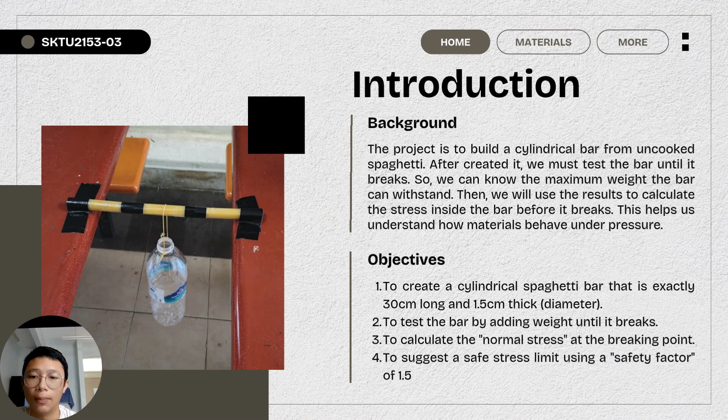Hi everyone, today I will present the model fabrication method part. There are three highlighted points that we want to show here. The first one is the material selection. We use spaghetti of any brand, a clear tape and a duct tape. Then for the geometry constraints, the spaghetti must be shaped into a circular bar with a diameter no more than 1.5 centimeters. The length of the bar must reach 30 centimeters, with 1 centimeter on each end acting as the holding point.

Next, we go to the connection and adhesive. The existing spaghetti in the market did not reach the 30 centimeters minimum length. So, the bar was separated into three sections of 10 centimeters each. The spaghetti in each section was taped using clear tape to hold the circular shape together. All three sections were then taped together using duct tape to form a 30 centimeter bar.

Next, we go to the testing part of the group assignment. There are three highlighted points here: the support, loading mechanism, and measurement tools. For the support, each end holds the bar with 1 centimeter length. For the loading mechanism, a single string was used to hang the water bottle attached in the middle of the bar. And for the measurement tools, the water volume was increased by 100 milliliters at a time using a measuring cup.

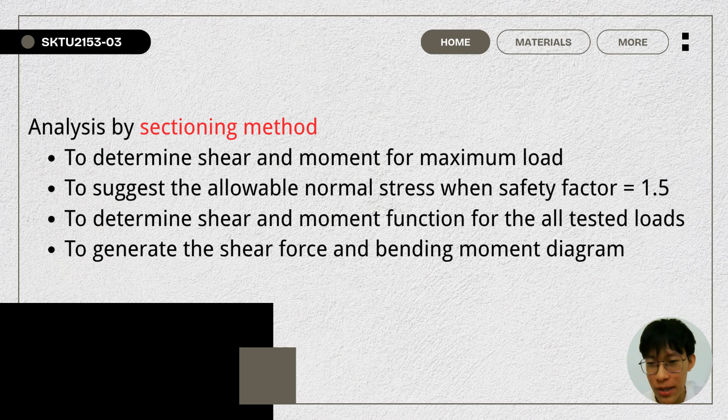Second is to suggest the allowable normal stress when the safety factor is equal to 1.5. Third is to determine the shear and moment functions for all tested load calculations. And finally, we can generate the shear force and bending moment diagram. We need to draw the free body diagram for calculation, and the assumption we make is 1 liter of water is equal to 1 kilogram. The maximum load we got in testing is 3.1 kilograms of water, and the force applied in the middle section of the spaghetti is equal to 3.1 kilograms times gravity, and finally we get

30.4 newtons. Then we need to find the reaction forces at point A and point D. For the first equation, we use the sum of moments at point A equal to 0, and we get Fd equal to 15.2 newtons. Second, the sum of forces in the y-axis is equal to 0, and we get the force at point A equal to 15.2.

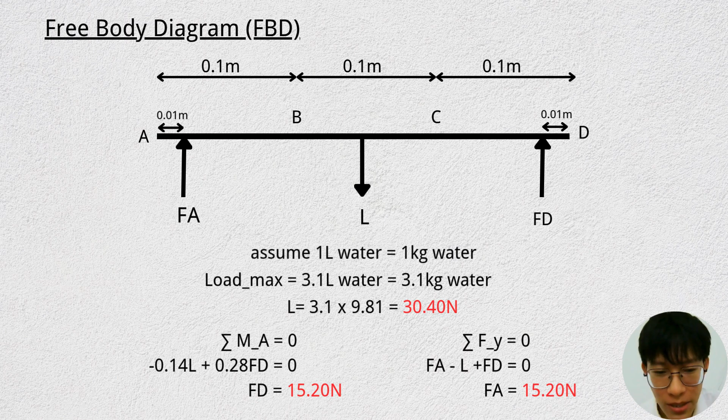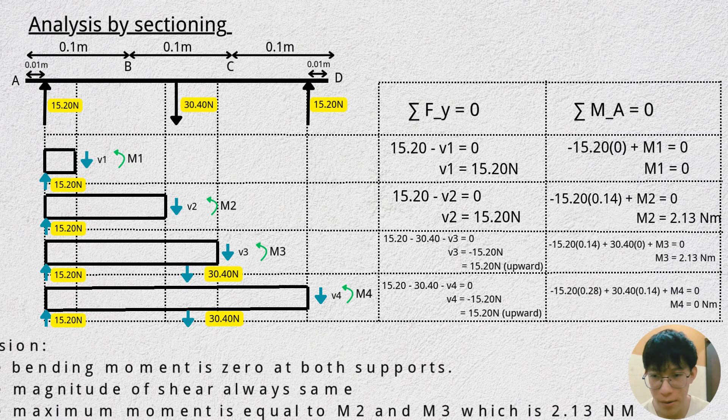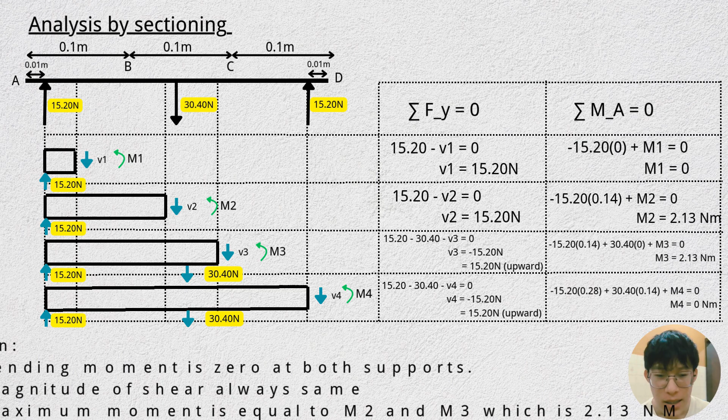After we get the reaction forces at point A and point D, and the force applied by the maximum load in the middle section of the spaghetti, we can divide the spaghetti into four sections and do the summation of Fy equal to 0 and summation of moment equal to 0 for each section. Finally, the conclusion: first, the bending moment is 0 at both supports. Second is the magnitude of shear is always the same. Third, the maximum moment is equal to M2 and M3, which is 2.13 newton meters.

We need to suggest the allowable stress when the safety factor is equal to 1.5. In this part of the calculation, we will involve two equations, one of which is the safety factor is equal to the ultimate stress divided by the allowable stress.

And the second is the ultimate stress is equal to moment times y bar divided by the moment of inertia. In step 1, we need to find the ultimate stress first. The maximum moment we got previously is equal to 2.13 Newton meter, the maximum y bar is equal to the radius of the circle, and the moment of inertia is equal to 1 over 4 pi times r to the power of 4. And finally, we can get the ultimate stress is equal to 6.43 megapascal.

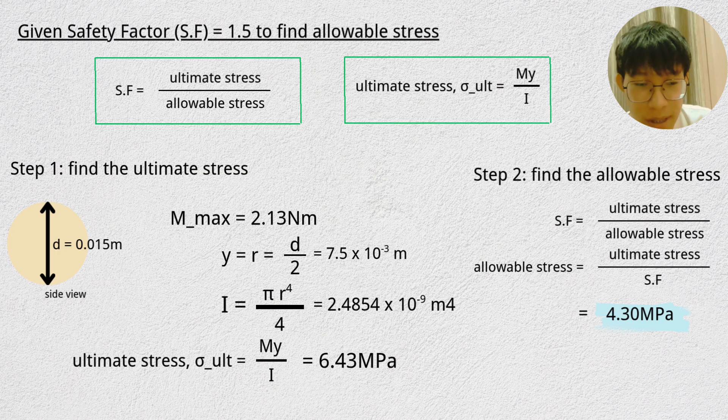In step 2, we need to find the allowable stress. The allowable stress is equal to ultimate stress divided by the safety factor. And finally, we can get the allowable stress is equal to 4.3 megapascal.

To calculate all the tested loads, we can determine the shear and moment function first. We can assume the load applied in the middle of the spaghetti is equal to 2F, and the range of 2F is actually all the tested loads. We can do the summation of moment at point A and the summation of force along the y-axis equal to 0, and we get the reaction force applied at point A and point D is F.

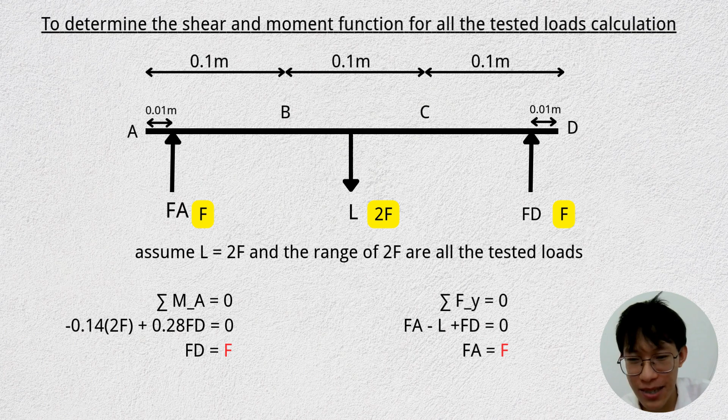From the conclusion in the previous part, we get the magnitude of shear force and the maximum moment present at the second and third section. We can consider the second section as our basis of calculation. Using the summation of Fy equal to 0, we get the shear is equal to F. Second, using the summation of moment equal to 0, we get the maximum moment is equal to 0.14 F.

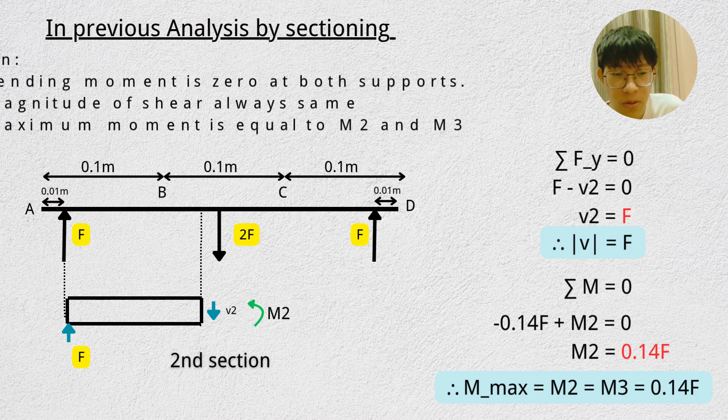Since the radius and moment of inertia of the circle remain the same, we can use the elastic section modulus to express the relationship. So in this case, the ultimate stress equation is equal to M over the constant S, which is equal to 3.02 times moment.

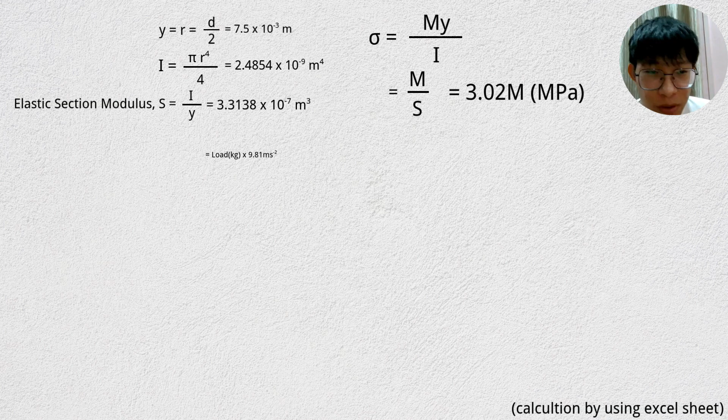Let us see an example: when 0.6 liter of water is added, there is 0.6 kilogram of water. So 2F is equal to 5.89, and F is half of 2F, equal to 2.94. The shear is equal to F, which is 2.94, and the moment is equal to 0.14 times F, which is 0.41, and the ultimate stress is equal to 3.02 times moment, so it is equal to 1.24. Okay.

And now I will introduce our shear force and bending moment diagrams. The first diagram is the FBD of our beam. This is a simply supported beam of 0.3 meter, with 30.4 newtons loaded at the middle of the beam, creating symmetrical upward reactions of 15.2 newton at both supports, 0.01 meter from both ends.

The second one is our shear force versus the length of the beam. The shear force starts at positive 15.2 newton initially, drops suddenly by 30.4 newtons at the center, and remains at negative 15.2 newton at the end. The last diagram is our bending moment versus the length of the beam. The moment changes linearly, starting from zero at both ends and peaking at the middle of the beam, with a maximum value of 2.13 Newton meter.

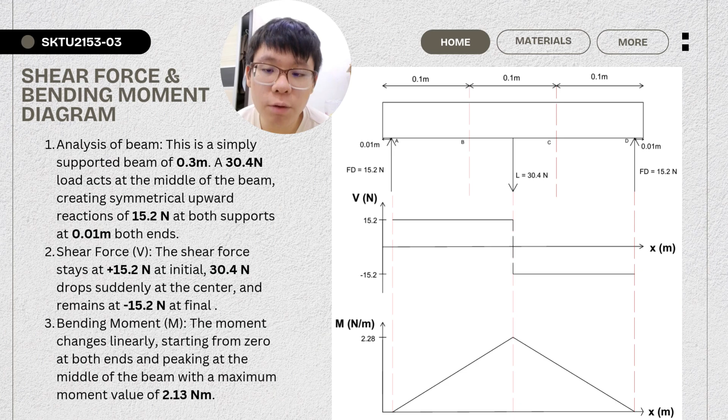So, to conclude our project, we successfully built a spaghetti bar that was 30 cm long with a 1.5 cm diameter with the help of a paper mold and tape. Our spaghetti bar broke when it reached a bending moment of 2.13 Newton meter, which corresponds to 3.1 liters of water added during the test. Using the test data, we calculated the ultimate stress to be 6.43 megapascal, and using a safety factor of 1.5, the safe allowable stress turns out to be 4.3 megapascal.

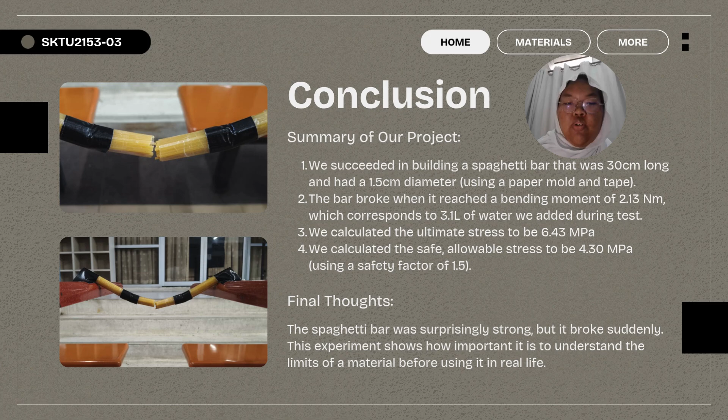Our final thought on the project is that our spaghetti bar was surprisingly strong, but it broke suddenly after the maximum volume of water was added. This experiment shows us how important it is to understand the limits of a material before we use it in real life.

Lastly, there are a few things we learned throughout the project. First, teamwork, because we had to work together to solve the problem of short spaghetti. We had to discuss how to combine the spaghetti and which length of each segment was more suitable so our spaghetti bar could hold a maximum load. Next, problem solving. We used our creativity to solve the problem of thickness by using a paper mold to help shape our spaghetti bar.

Next, practical application, because we used the formulas and math from our mechanics of materials class to calculate the ultimate stress and the safe allowable stress. Last but not least, careful testing, using 100 ml increments to get an accurate breaking point of the spaghetti bar.